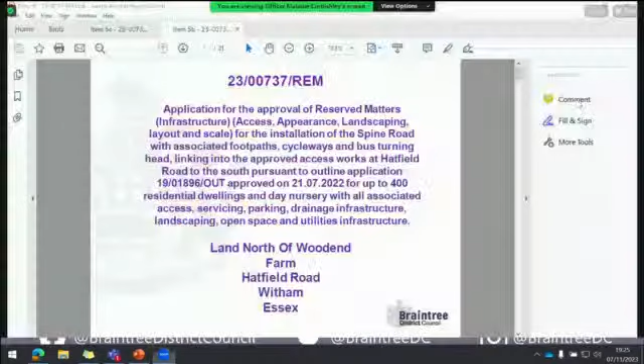Good evening, Chair. Good evening, members. The application I present to you this evening is in relation to a reserved matters application for the appearance, layout, scale, access and landscaping of a section of Spine Road pursuant to the outline permission for Wood End Farm.

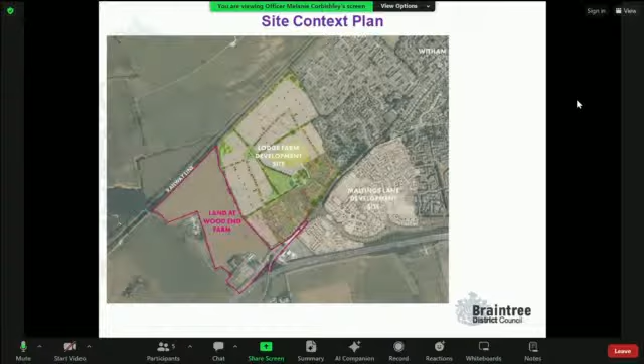Wood End Farm lies to the south of Witham, adjacent to the Redrow Lodge Farm development to the east, the railway line to the north, and the A12 to the south. The site is identified as a strategic growth location in the adopted local plan.

The details of the access into the site to the south were approved at the outline stage, subject to the necessary agreements with the Highway Authority. All matters other than the strategic access point into the site from Hatfield Road were reserved for future determination.

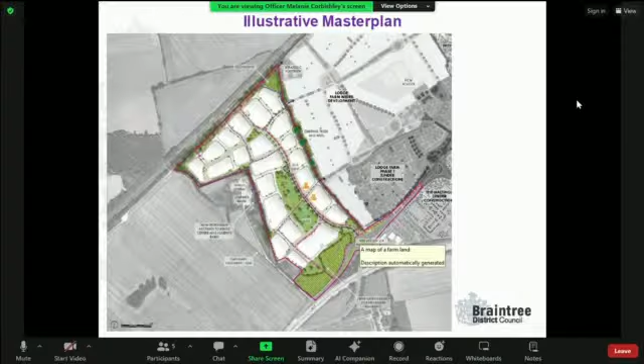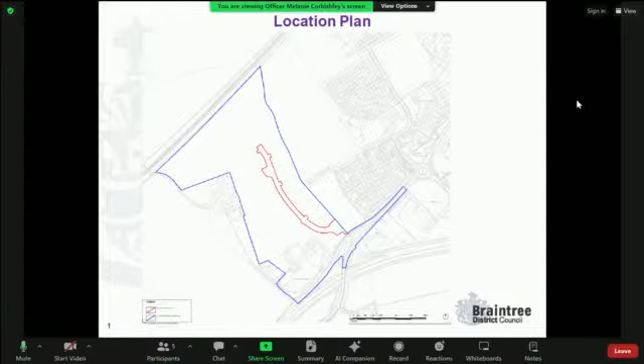This reserved matters application constitutes the first application to be submitted following outline consent. The purpose of this application is to provide the details for the general arrangement of the main development Spine Road and a small section of the secondary road north of the proposed bus turning, which provides the link between access from Hatfield Road and the future development parcels.

The road travels through the centre of the site in a north-south direction and is approximately 420 metres in length and 18 metres in total width. The road would be constructed to adoptable standards with a 6.75 metre width carriageway with 3 metre wide grass verges on either side of the carriageway and footways. The footway on the southern side of the carriageway would be 2 metres in width, with the footway on the northern side being a 3.5 metre shared footway cycleway.

The northern section of the road, beyond the bus turning head, narrows to 5.5 metres. A bus stop is located on the western side of the road, approximately 240 metres from the Hatfield Road junction.

Speed tables and speed cushions are proposed along the length of the road, and the road will be restricted to 20 miles per hour. A total of 8 visitor car parking spaces are located, defined as single and double spaces along the entire stretch of the road.

Streetlights will be located on both sides, with details coming forward by way of Condition 8 of the outline consent. The location of the street lighting has been considered as part of this application in terms of both the adoptable standards and conflict with trees, both of which are considered acceptable. No objection has been raised by the Highways Authority with regards to the layout and adoptability.

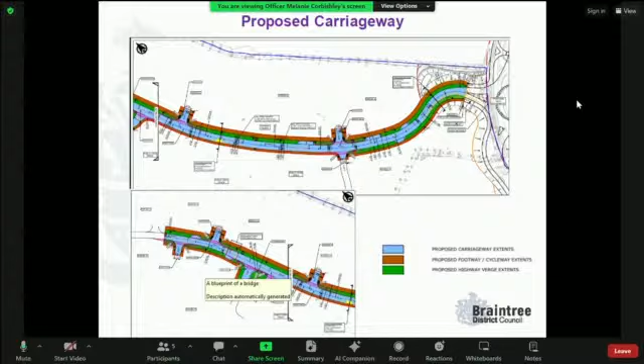In terms of the principle of development, a suite of parameter plans and a detailed design code forms part of the approved documents for the site at the outline stage, which any reserved matters must be in accordance with.

The approved transport and movement parameter plan, shown on screen, showed a Spine Road in the location proposed, with a roundabout to the south, indicated as a bus route. It also identifies a proposed strategic footway cycle link on the eastern side of the road, which runs to the north of the site.

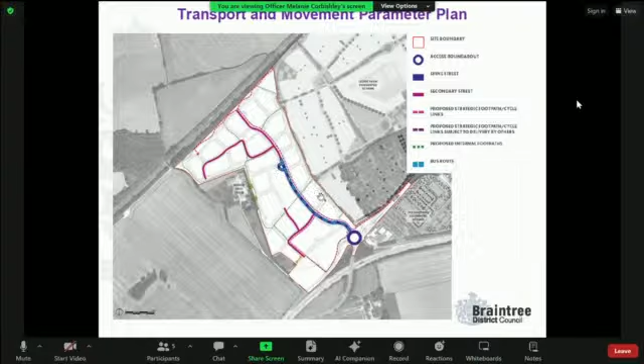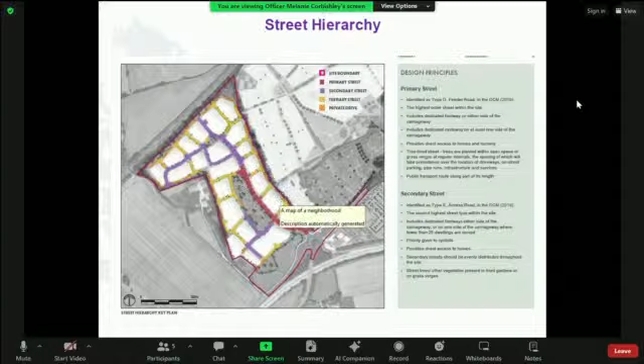The design code reiterates the design intentions for the road by setting out the detailed design and width of the Spine Road, verges, footway and cycleway. The Spine Road is indicated in pink on screen, with tertiary roads coming off and a dedicated footway link, and it is also tree-lined. The design code also indicates the indicative primary street sections. All of the design aspirations have been achieved with the reserved matters application.

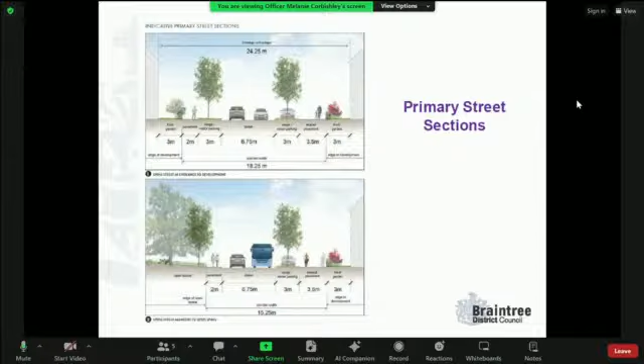In terms of landscaping, the code approved 3 different character areas within the site, which set the principles going forward for the landscape design of each section. The spine road dissects two of these, the gateway and the greens.

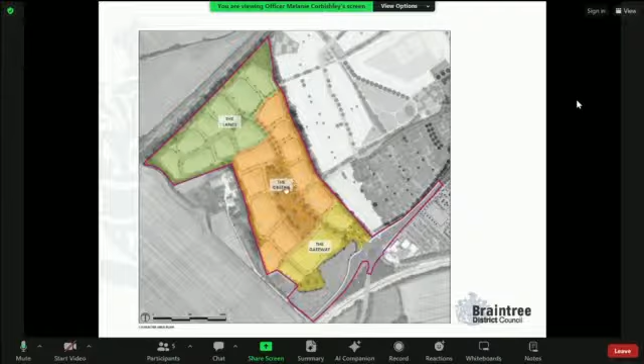In terms of landscaping to the spine road itself, the road will be tree-lined with a total of 25 new trees, positioned in the verge on both sides along the length of the spine road.

The design code sets out the illustrative planting palette for the primary and secondary street trees, as well as the gateway and feature street trees. The species selected along the spine road feature London plane, field maple, hornbeam, tulip tree and small leaf lime, forming a mixture of native and non-native species.

This application also includes the gateway green at the entrance of the site, which seeks to create a formal arrival point, including an area of green space and formal tree planting. The aim was not only to create an attractive entrance to the site, but also to set up the theme of green links throughout the development.

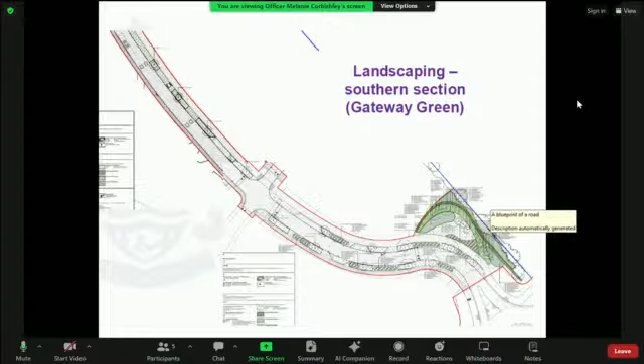There is specific illustration and guidance within the design code for the design of this particular area. The gateway green will consist of mown lawn with shrubs, ornamental bulb planting, clipped beech hedgerow, 4 large size stock false acacia trees, and 3 translocated elm saplings from the elm tree which sits within the highway at the front of the site. These are located there. The tree species have been selected in accordance with the illustrative species identified and agreed within the approved design code.

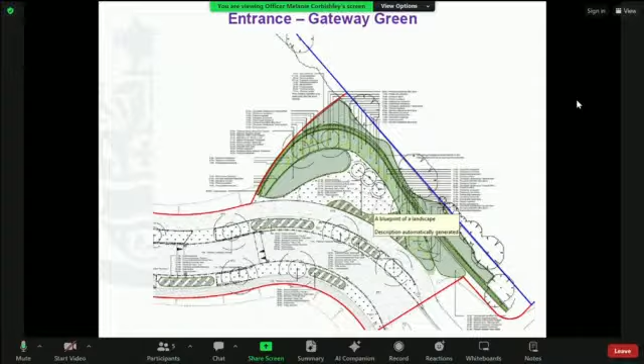No existing trees are to be removed as part of this proposal. A row of existing trees on the eastern boundary will also be incorporated into the planting. The trees will be protected during development in accordance with the arboricultural impact assessment accompanying this application, which has been assessed by the Council's arboriculturalist and is considered to be sound.

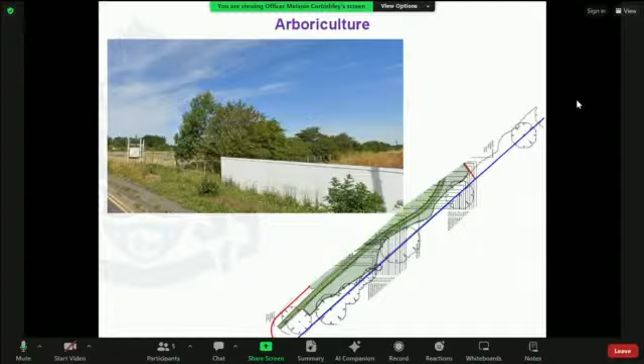The elm tree, which sits outside of this site on highway land, does not form part of this application. The principle of the removal of the elm tree was approved at the outline stage. A condition was attached to the outline permission for a feasibility study and methods to be undertaken with regards to its relocation. The applicant submitted a feasibility study and method statement in February and May this year.

The feasibility study concluded that the elm tree cannot be moved due to the significant and disruptive excavation required for the root plates, which are underneath the carriageway. However, the report states that the tree is suckering from the roots, creating a dense group of genetically identical young elms. The proposal is therefore to separate and move 6 of the root suckers, with additional ones kept in the nursery at Ruskin Trees and Landscape as a backup.

The 6 saplings will be incorporated into the on-site planting scheme, 3 proposed within the Gateway Green and 3 within the Central Park area. The Council has received a Reserved Matters application for the Central Park area, currently under assessment. Officers note Witham Town Council's comments, and discussions have started with Countryside on gifting any surplus trees to the Town Council. These discussions do not form part of this application and cannot be secured through it, but will continue in future.

In conclusion, the layout, scale, access, landscaping and appearance of the road are considered acceptable and functional, in accordance with the approved outline parameter plans and design code. The proposal would contribute towards sustainable travel, allowing for footways, cycleways and a new bus route. No existing trees are to be removed to facilitate the development, and the landscaping and tree-lined streets would create an attractive entrance into the site.

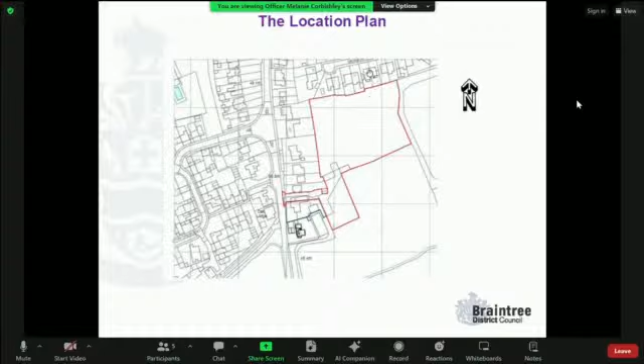In terms of designation, the application site is located outside of the defined village envelope and is therefore considered to be countryside.

The next two slides are indicative, but show you the site layout. This first one shows the 13 plots, so it's an inward-facing development backing onto the properties in Meadow Way and Witham Road. You can see the access road coming in between the existing property to the south, number 231, and 229 to the north.

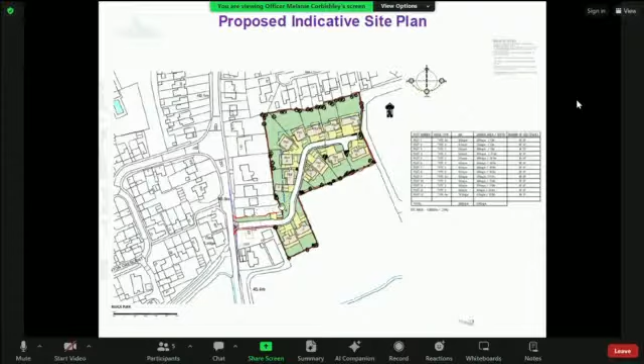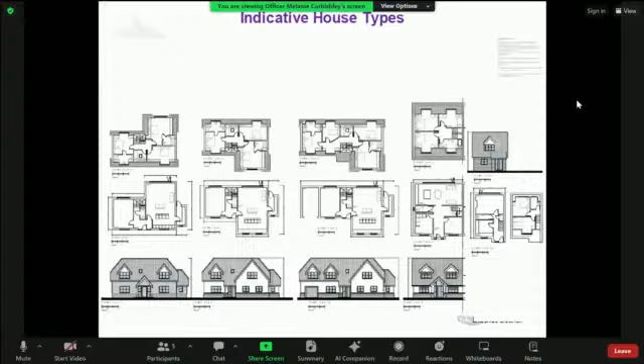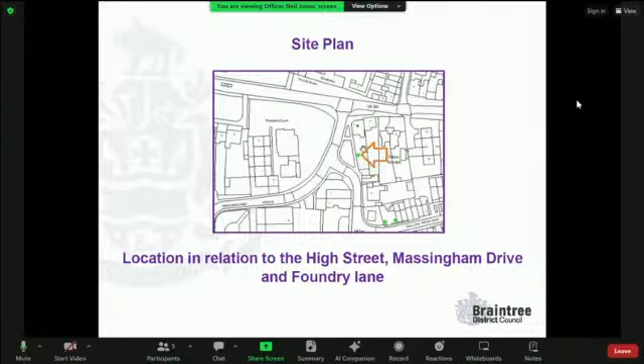For those familiar with Earls Colne, this provides the context of the site, relatively close to the High Street and Massingham Drive. This is the location of the tree in the garden of number 1. As wider context, the yellow line denotes the conservation area boundary, and the green dots refer to other TPOs within the central village. So we're looking at the site just here.

As you'll have seen from the comments from the resident objecting to the order being made, one of the complaints was about not only the debris falling within their garden, the pine needles and cones which fall throughout the year, but also bird faeces. The resident drew attention to the fact that local residents had complained to him previously about bird faeces dropping on the drive outside his property. Previously he cleared this himself, but due to his frustration he's not going to do that any longer. As we've explained in the report, the responsibility for clearing up debris from the tree, whether needles, cones or bird faeces, or issues arising from that, would not be a reason not to confirm a TPO when assessing an application.

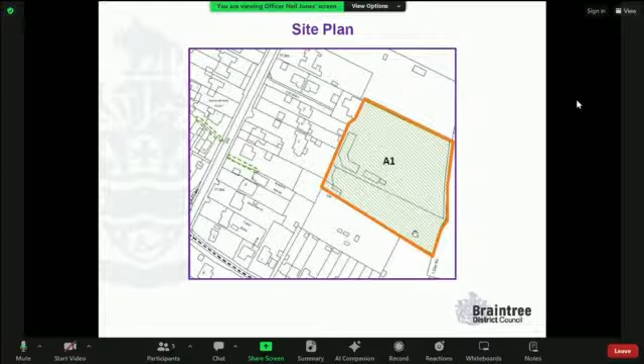The green hatched area, with the orange line around it, indicates the site. You can see London Road running down here, at the back of London Road, behind the houses, and on the mall, or the rear of the mall. This is an aerial photo showing that a bit more clearly.

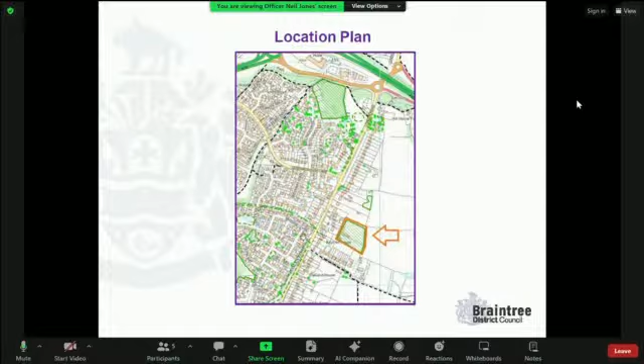And then the wider context, so you can see London Road coming down here from the A120, Great Notley on this side, so Black Notley here. And then if we just move on to the next slide.

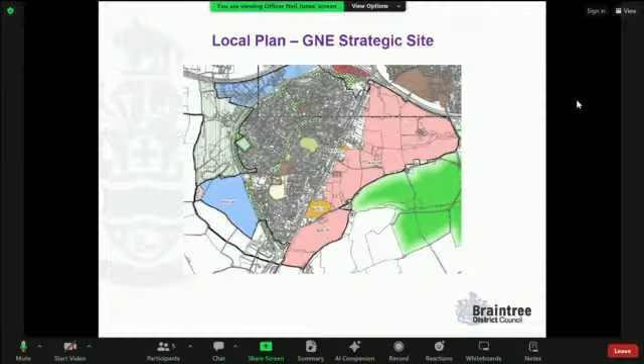So this is just to show the wider context. You've obviously got fields at the back. The land is allocated as part of what was known as land east of Great Notley, or Hazelwood Farm as it's known now. That's just to provide some extra context.

What we've done here is just show how the site potentially relates to the allocated site which we expect to come forward. You can see the master plan drawn up by that consortium of developers shows residential development to the rear of the site where the TPO is being considered.

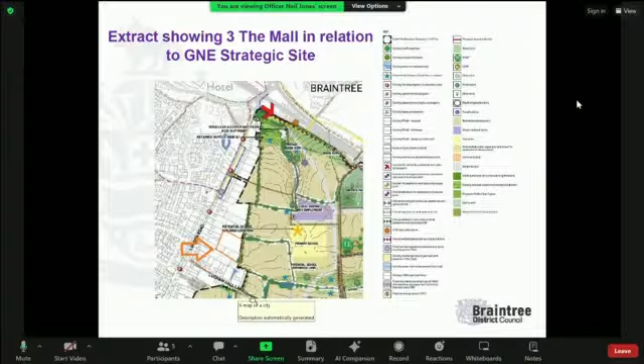Just for additional context in terms of where we are, because the mall is a little bit further up, Ludham Hall Lane just runs down here, which has got houses down it, and then a public right of way which runs into the fields beyond.

We've included a slide here showing part of the application submitted for a residential development. That application hasn't been determined yet. It's an outline application for up to 9 dwellings. As you heard and as you've seen in the report, when the planning application was submitted, it showed that some trees were proposed to be removed to facilitate that development. That led to the site being assessed and the temporary tree preservation order being put in place.

So it's important that we remember we're only considering the tree preservation order tonight. We're not considering the principle of residential development or the outline planning application. That will need to be determined at another time.

The agent, Mr. Firth, referred to the fact that he doesn't consider that we should be confirming the order before the planning application has been determined. Officers disagree. The order does need to be confirmed.

It's a temporary order at the moment, so it will expire shortly if we don't confirm it. When the council makes a determination on the planning application, if there were tree removal, which could include trees protected by a TPO, the planning permission would override the TPO. So by putting the TPO on, it provides an additional level of protection going forward, because it will be made permanent. But it doesn't prevent trees being removed in the future if the planning permission were to be granted.

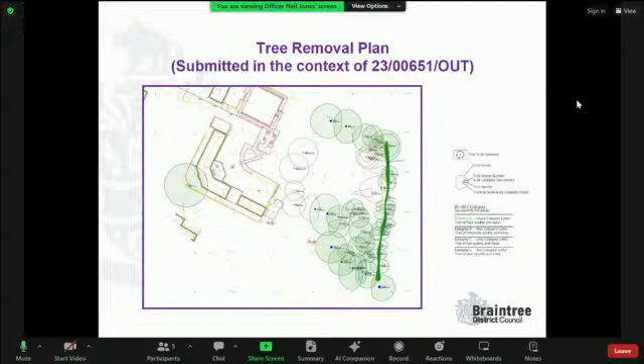So if officers or members were to consider an application for residential development in the future which necessitated tree removal, and in the balance that was considered acceptable, that could be done. So we don't see the planning application as being a reason not to consider making the TPO order permanent.

As I said, originally when the temporary TPO was drafted, 52 trees were identified. Officers are recommending that that be modified. Following further assessment by the tree officer, which is really part of the purpose of the temporary order being made, to allow us to investigate and carry out further assessment, the council's tree officer has recommended it be modified so it would cover 45 trees.

So to explain, of the 7 trees covered by the temporary order which we're not considering for the permanent order: 3 are category U trees, assessed to be of poor quality by the tree officer and therefore not suitable for inclusion. 2 are willow trees, the larger trees within the garden, which have a relatively short lifespan and so aren't considered suitable either. And then there were 2 trees, T8 and T12, identified to have heavy leans, and as a result aren't considered to be of a condition worthy of inclusion. The other trees are considered worthy and are included.

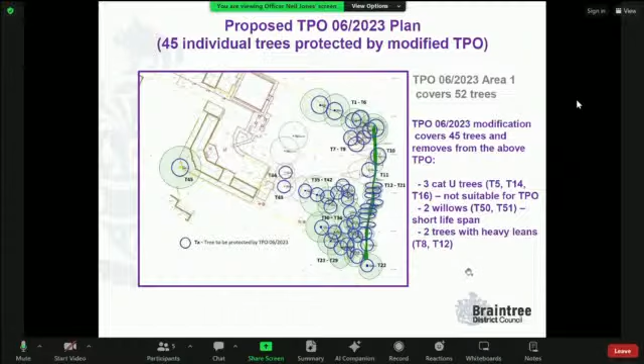In terms of some photographs to show the site, the photos are predominantly from London Road, which is where the predominant public views would be.